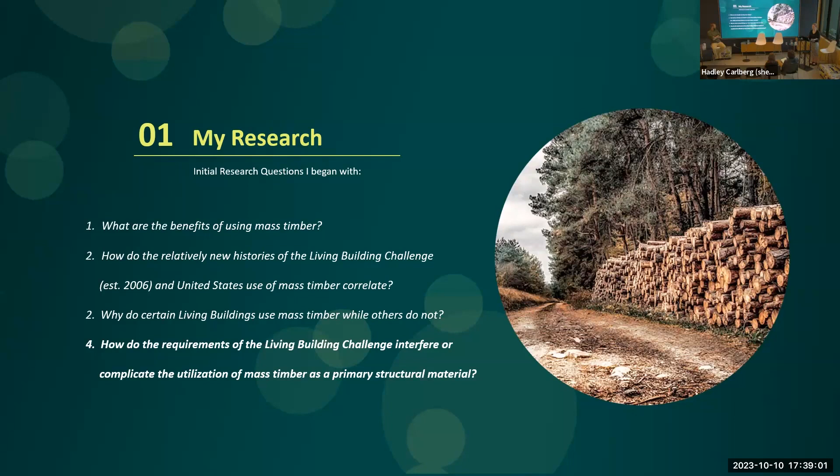So my job here is just to give you a little brief overview of the intersection of mass timber and Living Building Challenge. So looking at the question of what is a Living Building Challenge, they have this quoted on their website: it's to make the world work for 100% of humanity without ecological offense or the disadvantage of anyone.

So I really see it as being two-sided, both environmentally sustainable and socially sustainable, which I think is a really unique part of this green building certification, where almost half of the petals are looking at social equity and sustainability for the people involved in the project and how the land affects people, as well as the environmental aspects, which are typical of green building certifications.

So version 4.0 of the Living Building Challenge allowed it to be more inclusive of budget and restrictions by creating a tiered system of certifications. Karen can talk a little bit more later about the core certification with involvement in a recent project. But the most typical certification is the full Living Building certification that has all 20 imperatives checked off within each of the 7 categories of the living building. But each of these spans from 100% building energy efficiency all the way to every single requirement met.

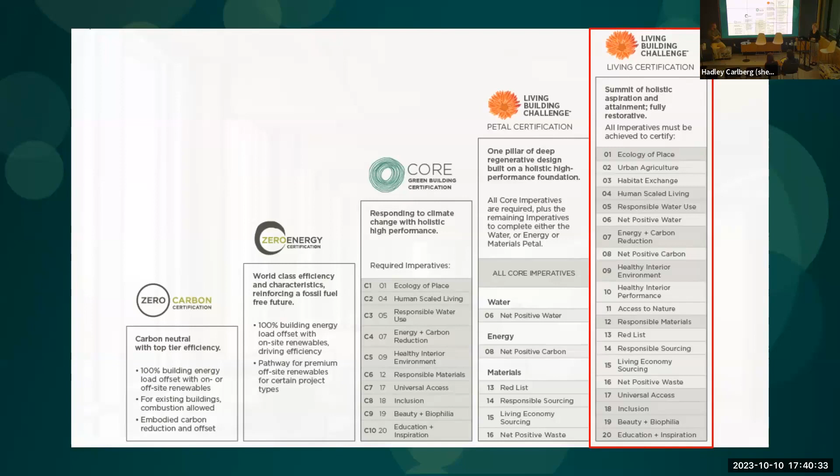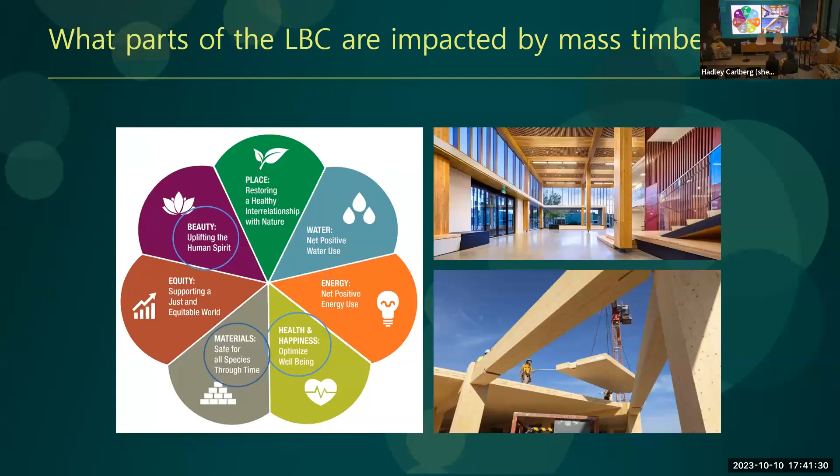So in terms of correlating with mass timber, it really is involved in the materials petal, the health and happiness petal, which is involved in indoor air quality impacted by all the materials in the building, and beauty, which has to do with biophilia and people's access to nature and warmth, and wood having an impact on that.

So within the materials petal of the Living Building Challenge, there's 5 imperatives. The Living Building Challenge is very complicated and has like a 100-page document of the full thing, and then 100-page documents of each of the categories. So it gets a little bit complicated. But here's the materials petal broken down into these 5 categories, and I'll point out specifically how it is impacted by mass timber use.

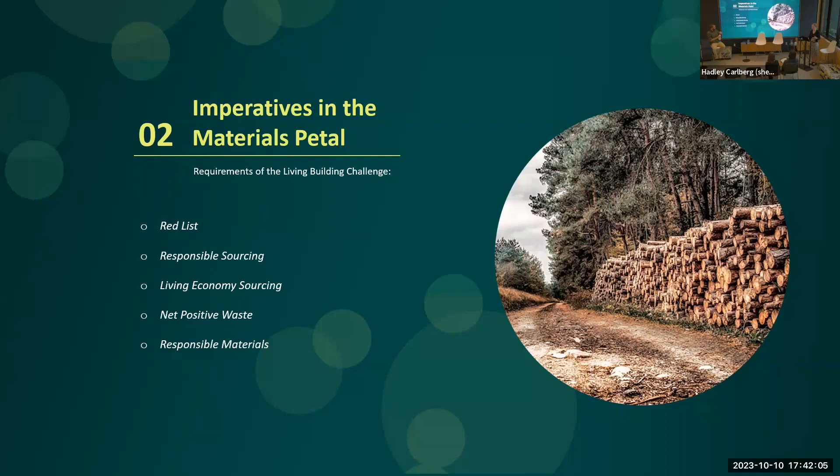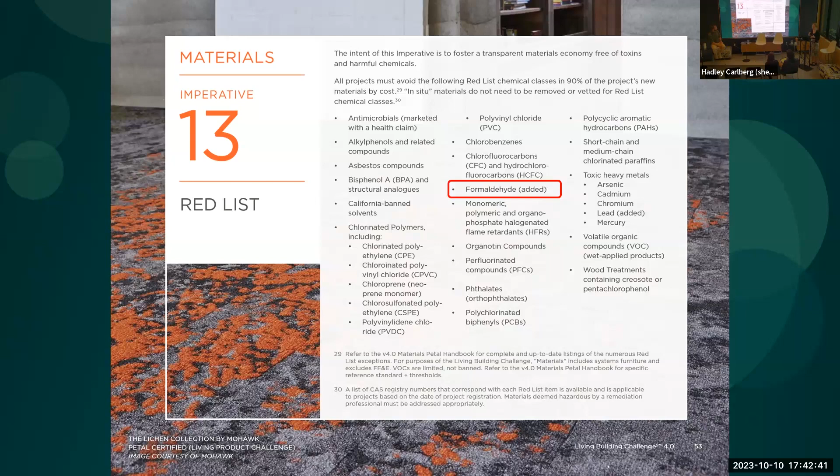So the imperative called the red list is looking at how 90% of the materials by cost within a project should exclude any of the red list materials, which has to do with volatile organic compounds and different toxins that people don't want in their built environment. And so in terms of mass timber, formaldehyde is often added in adhesive resins that glue together the mass timber elements. And so this can complicate projects, which we'll hear more from our panel about.

The responsible sourcing imperative looks more specifically at how 80% or more of wood in a living building certified project has to be certified by the Forest Stewardship Council, so FSC certified. There are exceptions for harvested or salvaged wood, and Jacob can speak more on how this relates to LEED versus LBC in terms of responsible sourcing for the PDX expansion project. But the FSC has a large impact on mass timber buildings in living building.

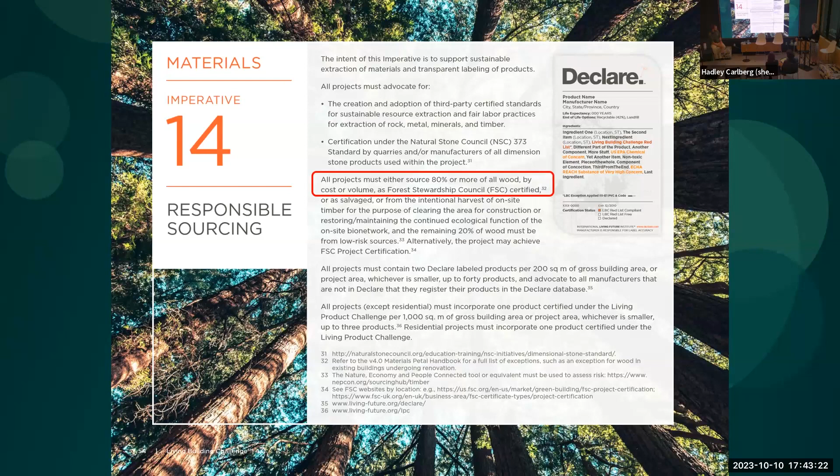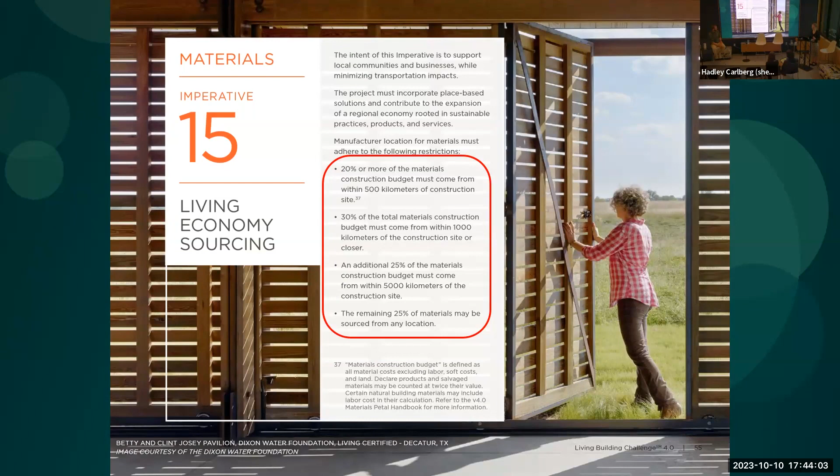The living economy sourcing has this tiered system of location-specific sourcing of all the materials in the project. So 20% must come from within 500 kilometers, 30% within 1,000 kilometers, and then 25% on top of that within 5,000 kilometers. So this adds some complication when you pair it with the FSC certification — you need 80% of the wood being sourced by FSC, but also if you're using that as a primary structural material, it has to be coming from pretty close. So we'll talk about location-specific challenges as well.

And then net positive waste.

This didn't seem to typically be an issue with mass timber, since a lot of mass timber production is in prefabrication, which minimizes waste at construction sites. But generally, 90% of wood by weight has to have all the waste diverted from a landfill.

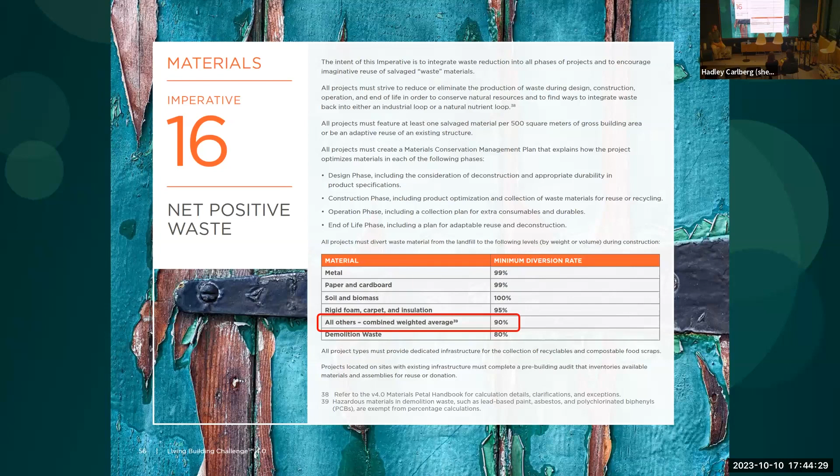This imperative kind of summarizes the rest of the imperatives regarding the tiered system. The core certification requires a little bit less than the other tiers—for example, it only requires 50% of wood products to be FSC certified. So it's wrapping those all into another imperative for the lesser certifications.

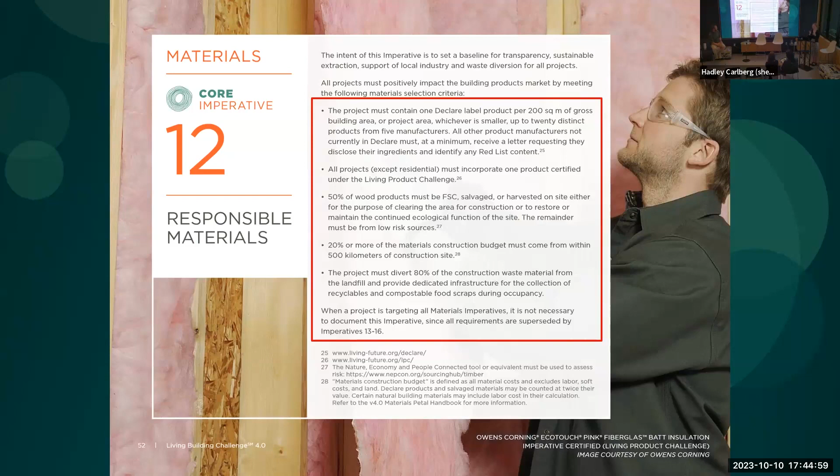So the main topics we'll be discussing as a panel are sourcing with mass timber, embodied carbon, cost, the red list, and biophilia.

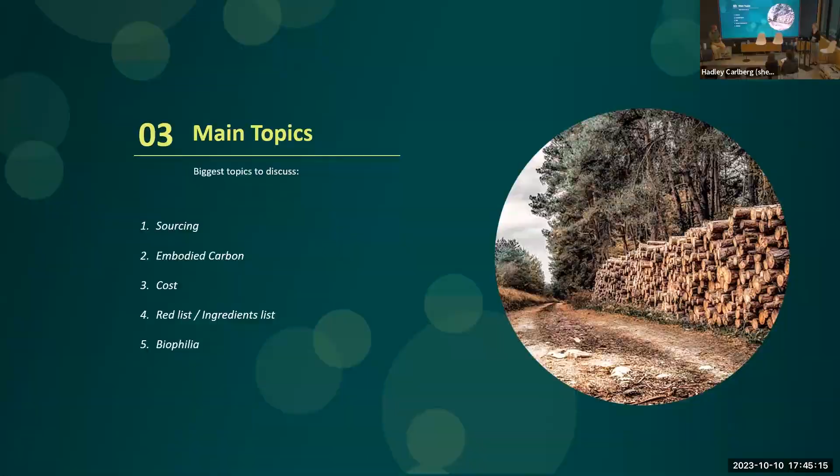Now we'll get into introducing all of the projects that we have experience with on the panel. We're going to introduce our projects as context—taking the theoretical, what we've all learned. I'm Joslin, sustainability leader, engineer. What we're going to do is talk about our project experience. I actually have the good fortune to have project experience with everybody out there, which is really cool, plus ongoing project experience. So I'm going to start off with our PAE building that we're in right now.

I wanted to make sure we touch on some of the specific things we might not talk about in terms of mass timber, so you understand the concept of this building, since we're existing in it right now.

Living building will be certified actually soon—we got everything accepted in the audit. This is version 3.1 living building, which is different than the 4.0, and a lot of things were interrupted because of COVID. This started being erected literally in May of 2020, and I had all kinds of shots of completely empty streets in downtown Portland as each level went up, one level per week.

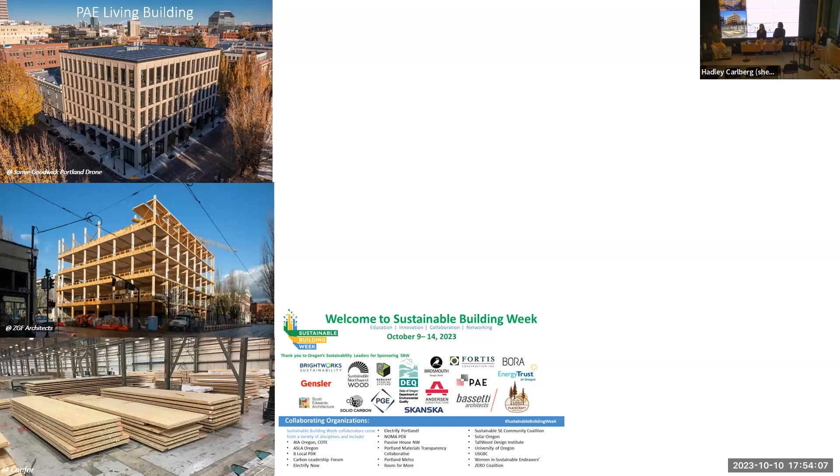Okay, cool. So I'm gonna hand it off to my friend and my conspirator, Andrew, at FFA. I'm getting to be a part of this project too in a wonderfully rewarding way.

So this is the Blue Lake Park Operations and Maintenance Building. These are two images of the project. The client is Metro, a public client who manages all the nature areas around the region, definitely a smaller scale project, but a unique thing is that Metro has adopted the Core Green Building certification, the condensed version of the Living Building Challenge standard, as their baseline for all new construction and renovation.

The images here are of a new office that we're designing for them. They have an existing warehouse on site that is also part of the project, and that's going to be renovated, and all the office uses that are in there, along with a lot of other things, are going to come out and be separate. I'll be talking about it more through the lens of achieving the still very high, ambitious standard that is Core Green certification, a smaller scale project that has just municipal public budgets, and how we're able to deliver on that in different ways.

I'm not from the area originally. This is out in what technically is Fairview. It's right along the Columbia River, 8 miles east of the airport, and it's in a huge, pretty well loved park. There's other sensitivities around the site as well. We'll be able to get into it.

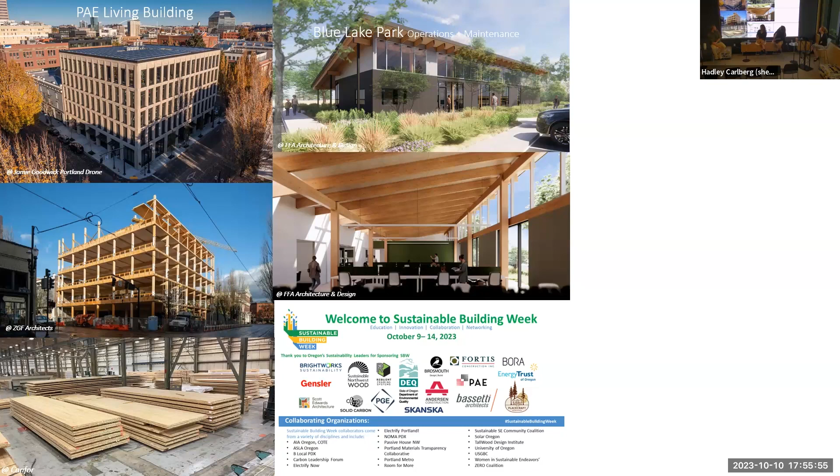I'm Alese Ashuckian. I work for SmartLam, and I am part of this panel discussion because I worked on the PAE project along with Karen. I was working for Smartlam at the time, who was the mass timber supplier for the glulam and the CLT. My role in working with the project team was to help coordinate our FSC source lumber, getting all of the ingredient information from our glue formulas incorporated into our Declare label, so that we can provide that material transparency and meet those petal requirements on the material side.

I have a full slide for you after this one. Okay, you have your own whole slide. Okay, so I'll leave it at that. No, it's fine.

Jake Dunn with ZGF Architects, in our Portland office. I'm a full-time sustainability coordination staff, so I've got the really lucky position to be able to work across multiple projects at our firm, and now across the country, to try to help these project teams make their projects more sustainable. That's everything from looking at mass timber sourcing to certification support to working with engineers like Karen and crew on mechanical system design. It's really just all over the place.

We're going to talk a little bit about the Portland Airport. It's not a Living Building Challenge project, so it doesn't really fit well within our theme for today, but the sourcing story we think does have some implications for the way that we might see these types of sourcing requirements in certifications as they evolve into the future, both in terms of the way that LEED has changed their certification requirements and how LBC might do that in the future as well. So we're all going to talk a little bit with Karen and Alese and everyone up here on the PAE Living Building project, and also talk a little bit about the airport as well.

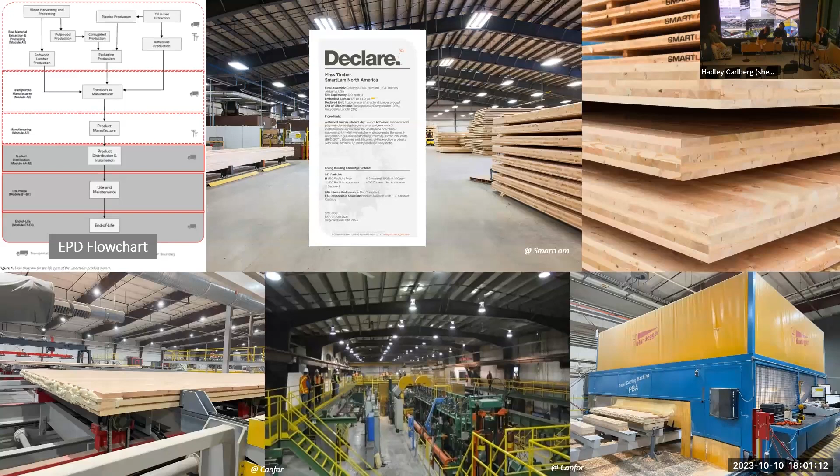Yeah, so if you advance the slide, this is the other stuff. I have them credited probably wrong. No, it's fine. You sent so many fabulous photos. Yeah, so basically in sharing the photos with Karen for today, I wanted to show what goes into the process.

For the PAE project specifically, we worked with Canfor to source our FSC lumber. They have the mills in the East Kootenays, and this is a photo of their Radium Hot Springs mill, one of their FSC mills. I believe it's about 440 miles from here as the crow flies, so it's within those distance requirements, which was an exciting discovery as we were developing the project and looking at lumber sourcing options, that it met FSC and was within the mileage that LBC was targeting.

And then the project on the bottom left really shows our glue. That's why I put it up.

When we're looking at the declare label process and material transparency, the glue formulas are really where we need that transparency, and where a lot of those red list ingredients come into play. Specific to this project, in 2018 the PRG 320 standards for manufacturing changed the requirements for glue formulas due to fire testing. Previously, without fire retardant ingredients in the wood, they were experiencing delamination of the bottom layer of the CLT during fire tests. So they changed the glue formula to require fire retardant within it, so that wouldn't occur in the event of a fire.

So I think we're now opening up to questions. We have these topics of biophilia, the red list which we were just getting into, cost, embodied carbon, and sourcing. I don't know if everyone's interested in particular items, but we can bounce around.

One question is how much further does this need to go before it becomes more widespread, especially with the ongoing shift from prescriptive to performance-based building regulations. What else needs to change in the regulatory environment to make mass timber and CLT more widespread?

I would say grow more trees. I'm not joking. Are you asking specific to the Living Building Challenge or mass timber in general? Just in general, making it more widespread as opposed to a niche application, since there's potential to grow it enormously and the regulatory environment is amenable to it.

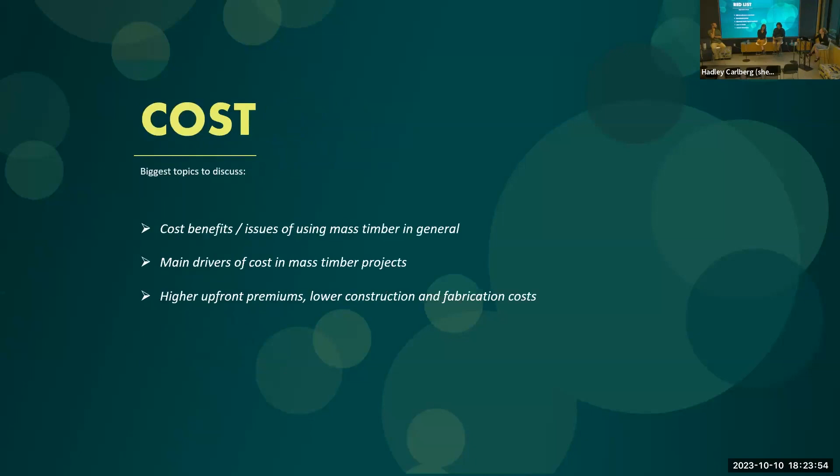I think in the lens of the living building challenge, we had talked in the past week about some premiums related to FSC specifically. Maybe I'll tee you up on that topic, where you have some more knowledge about that.

Yeah, definitely. So FSC is a requirement of the living building challenge. That was, at least for this project, something we had to comply with. So working with what we're certified to make, what lumber grades and species we needed for the project, what moisture content we need our lumber to meet in order to meet manufacturing standards, and who can provide that, that narrowed it down to Canfor as our supply option, but with FSC there is a premium.

And I know we compiled some data on that. My numbers guy, we've got some numbers. He's a creative design professional, and he's got his iPad with it. But it was only about $200,000 premium for the FSC add, which is surprising given how much the total wood was.

It's pretty low, I'd say that's a good deal, and I think that's generally what we're seeing from the Canadian supply chain, that the premiums tend to be a little bit smaller than what we've seen with some of the domestic supply chains. But at a $200,000 premium, that is a 14% premium on the supply, a 7% premium on the install product, so supply and install translates to about a 1% overall premium on the direct construction cost of the whole project.

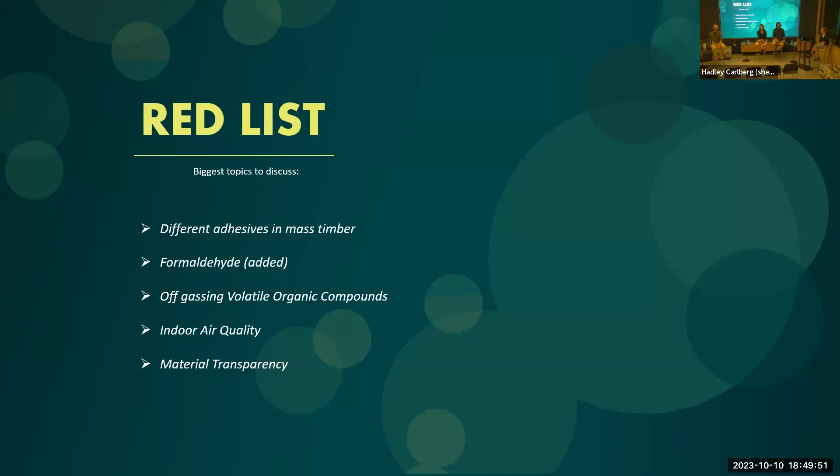You can slide the scale on productivity. There's a lot of studies that say anywhere from as low as 5% up to 15%, productivity and creativity are increased by having more biophilic design in your space. So by having more productivity happening and that presenteeism going away, you're getting more work done in less time, saving money. And so it just shows you the bottom line by investing in having those biophilic elements.

I do plants for interiors, so that's why I'm very passionate about it. It's my job.

Having that investment into your space can increase productivity and increase the ROI on the bottom dollar of the company. Over 90% of costs that go into a building are actually spent on people, whether through salaries, workers' comp, all kinds of things. Most of your cost is going to human beings. So I think it's hilarious that we spend so much time on that 1% of energy efficiency, like the light bulbs. Come on. What's costing us so much money that we're losing by not focusing on our people in general, with mental health and all those other things? So it's a broad spectrum. It all comes together as a puzzle piece, but 90% versus 1%. We should be focusing on how to create environments that are healthy for people in a built environment. I'm super passionate about that.